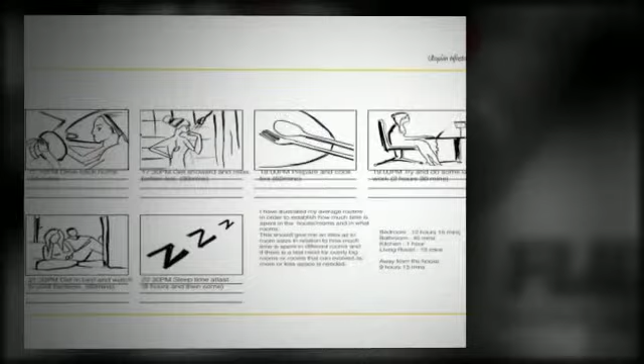I understood that designing a large-scale project would be difficult, so I focused on the home and adaptable living spaces, where interiors changed through the seasons and occupants could extend rooms when they wanted. My first thoughts were about how we occupy rooms at certain times of day, moving through the house.

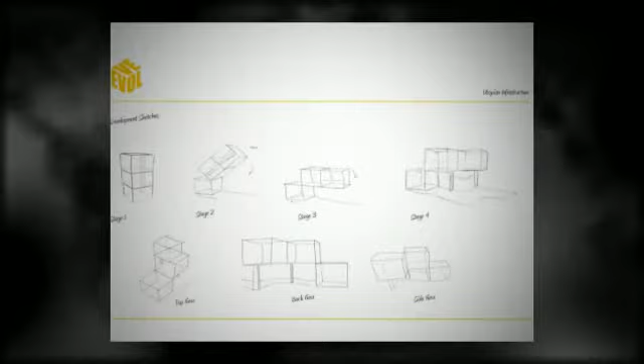It gave me an idea that rooms could evolve as more space is needed. I came up with a model based on folding out cubes, so that as the needs of the family change and evolve, so can their homes. In my design, it was a response to the need for a home or building to progress rather than age.

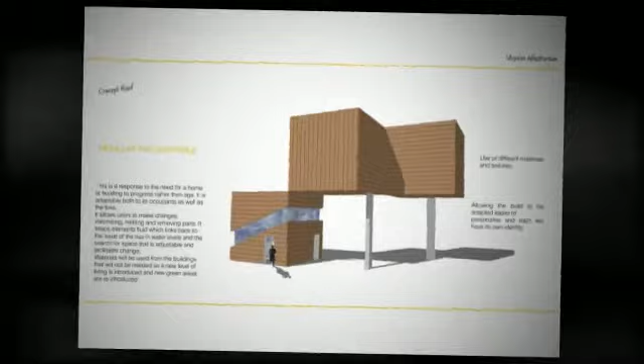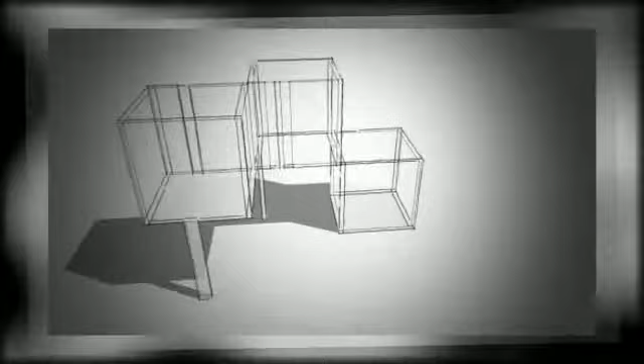It was adaptable to both its occupants and the time. It allowed users to make changes, minimizing, refitting and removing parts. It keeps elements fluid, which links back to the issue of rising sea levels, and to the search for space that is adjustable and facilitates change.

In semester 3, having looked at the evolving home, I realised that building a home wasn't the answer. Again, it comes back to the relationship between the building and the inhabitants. During the research in my dissertation, it became clear that we are designing rigid buildings that don't reflect the user.

I drew upon my knowledge of human kinetics and how the body moves. We respond to our environment, and in some cases we are forced to adapt to our surroundings, like when we go to work, we cannot change the space or the way it functions, only move objects around within it.

A lot of inspiration can come from the body. The works of Santiago Calatrava, such as the Turning Torso, had a direct influence, the twisting of the spine creating a twisting tower, making reference to the characteristics of the human body, the skeleton and the exterior membrane walls.

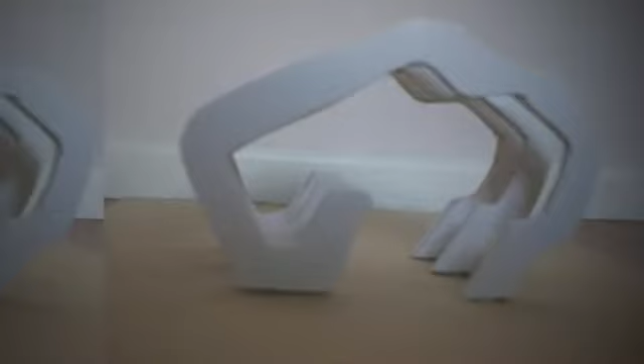There are lots of elements of the body that can refer to buildings: hinge movements, contracting muscles. I feel architecture can go further in responding to the human body. It extends and enhances human capacities, it is changeable and supple, and constantly adapts to its environment. As the body is designed for movement and thrives from it, buildings should reflect and adapt to us.

I don't think the key to developing an adaptable environment is to banish straight lines and start designing organic forms. I've understood as a designer to think intelligently about how space can support and reflect adaptability. It's not just about movement on its own, as you need a solid platform for movement and flexibility to occur.

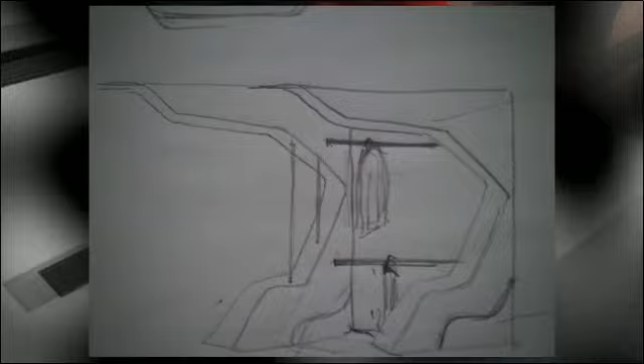Through research, it is now more important to facilitate adaptability and the relationship between the building, space and environment. I don't believe reusing is enough; it's a case of prolonging reuse over time and allowing changes to be made as and when needed, be it daily, weekly or yearly. These are all aspects that have informed my design thinking and development.

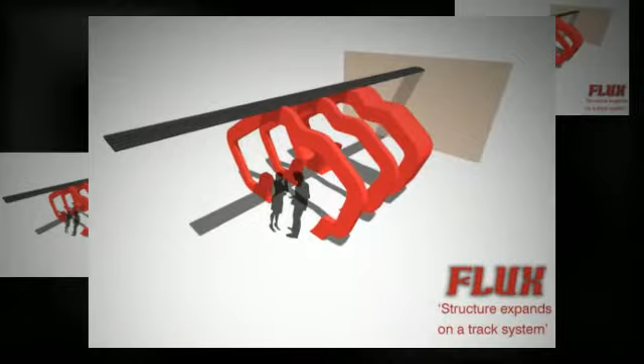For my dissertation research, I developed Flux, a space that changes over a day. It adapts from the early morning coffee rush, to expanding into a retail space throughout the afternoon, and by evening a bar. Its rib-like structures operate by a track system allowing effortless movement, expanding and contracting to maximize the space while adapting as and when used.